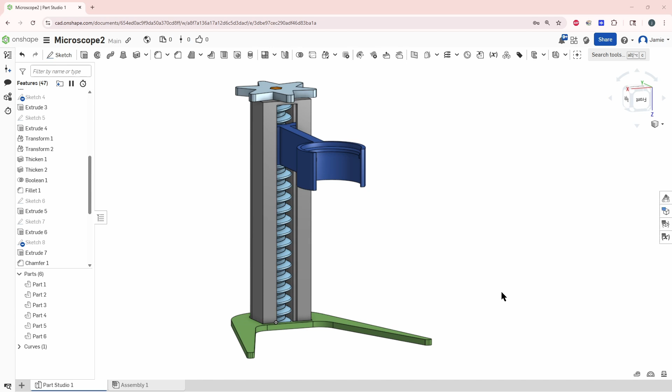Hello, this will be part 2 of the microscope, and this time I will be working on creating a modular microscope. I will create another holder, and then another screw, and interlock them together. So the two holders will interlock and the two screws will interlock with a hex key. Alright, let's get started.

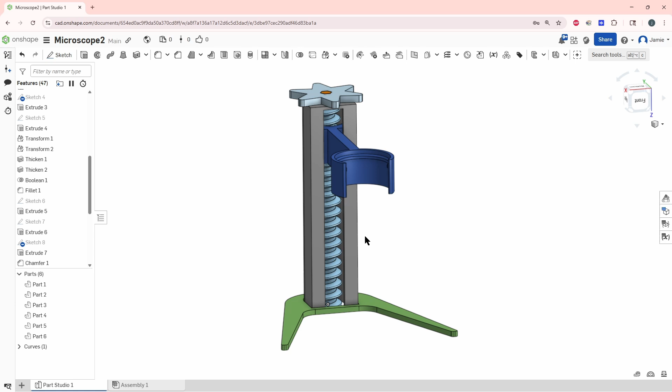First, let's take this one and transform it. I'm going to grab these items right here: 1, 2, 3, and this guy right here, 4. Okay, and I'm going to move them straight up. So I'm going to translate X, Y, Z, and then we're going to go in the negative Z.

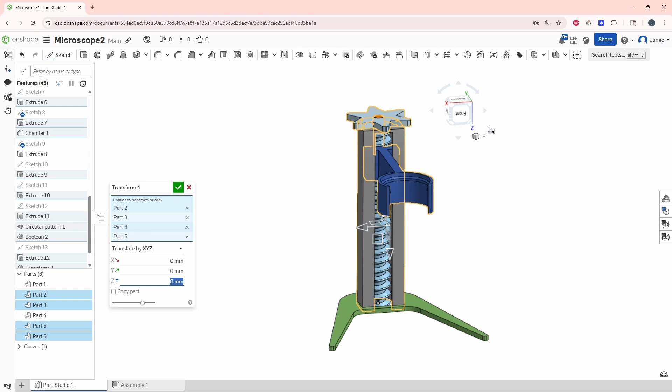Let's pull this over, so it's negative Z right here. We're going to go negative 120, and we're going to not copy. Here we go.

We can actually select this guy too. We're going to make a new one of those, not the hex itself, but the actual body. So there we are, choose OK. And our hex, we can left click, right click, and hide this guy.

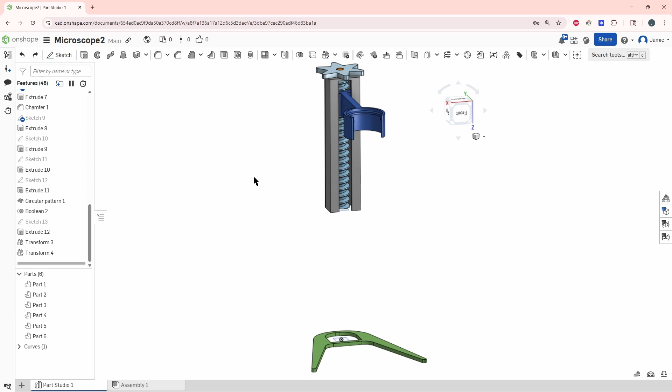Alright, so now we're going to transform these two pieces and move them down. X, Y, Z, and 120. We're going to copy these parts now. Click on that little button right there, green check.

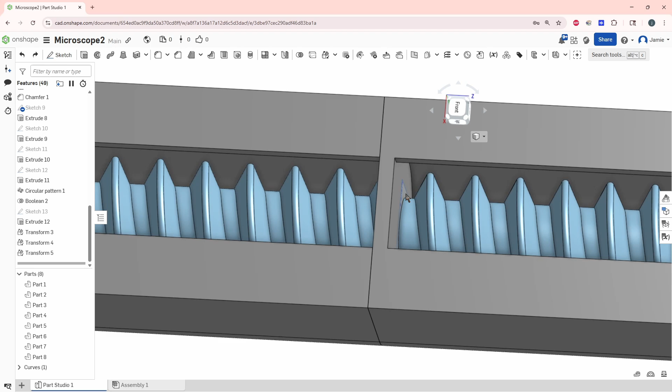So now we have the height, and we can see that this does not match up with each other. So I need to blow this through, or what I'll do is take this and match this edge up with this edge right here. That's 4 millimeters because the helix coil was 4 millimeters.

So let's go create a plane on this surface right here. We're going to push that 4 millimeters down, and this will be our split plane. Okay, so now we've got to do a split.

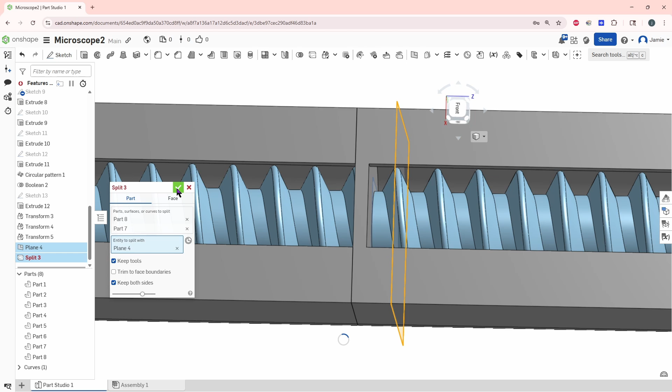I'm going to click on this guy, click on this guy, and we're going to split with this plane right here. It's okay, it's thinking. Alright, so now we can do a delete part right here. I'm going to delete that guy, delete this guy. Okay.

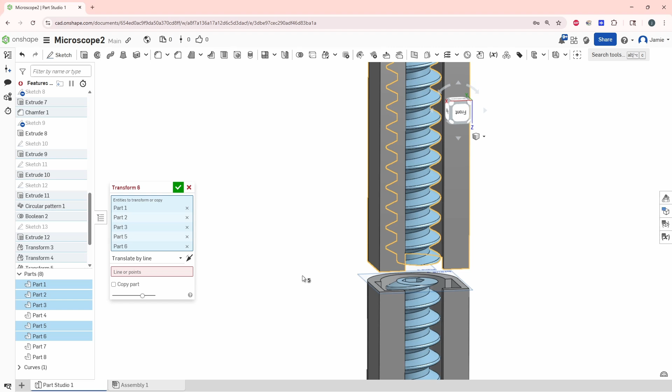Alright, now we're going to do a transform, and we're going to take these items 1, 2, 3, 4, and 5, and translate them down the 4 millimeters plus 2 millimeters because of the extra gap I already had. So 6 millimeters total. Let's go -6, or I'm sorry, we're going +6. No copy, just moving it down.

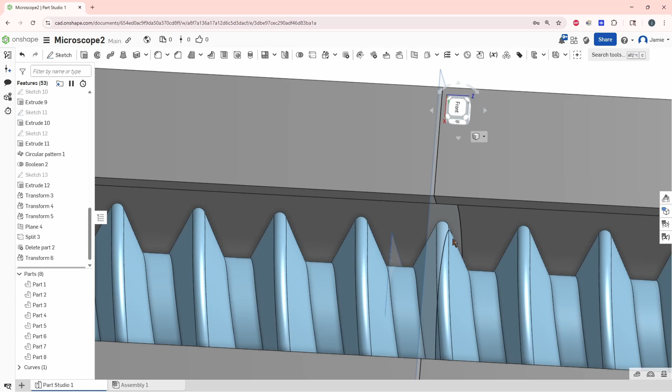Alright, and there we are. Let's see, our shape is matched up now. So now when we 3D print this, after we're done, we could put a little identification mark, maybe a little paint mark right there to match up those two.

So now we will need this hex down here. This hex has to go in between here. So let's move that down. Let's create a copy of it, and we can move it down. So let's do a transform.

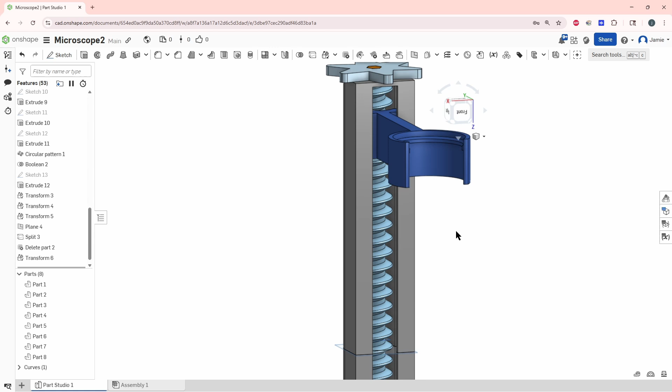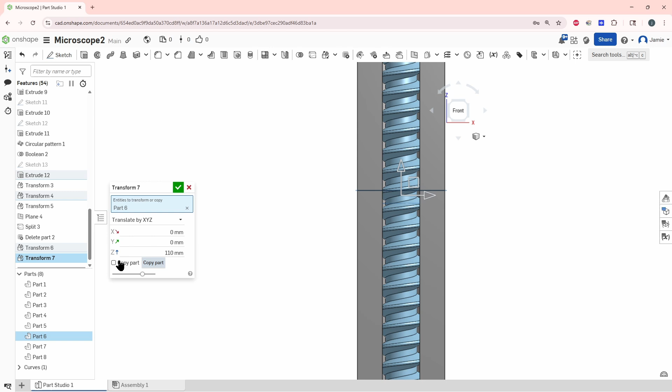Grab this guy. It's having a hard time choosing it. There we go, alright, and we just grab. We can actually click over here, do X, Y, Z, click on front, and pull it to where we think it's approximately. And we need to copy part. Say OK.

Now let's click there, hide that part. We can hit Y to hide that, and we can see our hexes inside of there. Okay, control Z to undo that. Now we've got our 2 hex to tie those into place.

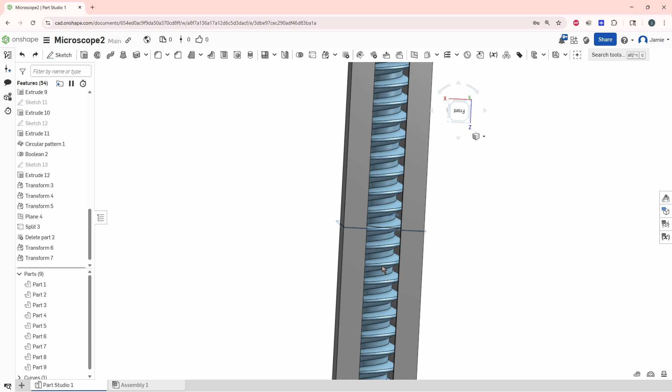Now we will need to create the geometry to hold these guys in. So let's start a sketch on this surface right here. Let's hide this guy: click that, hit Y, click this, click Y, click that, Y. So now we're going to create a sketch on this surface right here. So let's go to sketch.

And let's start, now we can create our shape here. Just a rectangle here to here. Escape, dimension here to here. We'll do like 8 millimeters here to here, 4 millimeters.

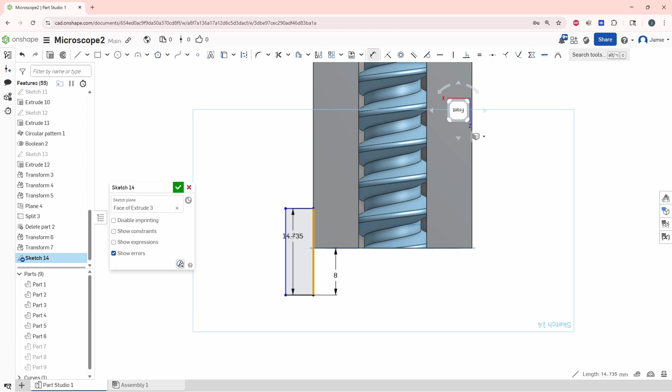And then we're going to create a shape that goes basically from here to here. We're gonna match it up so we hover over that one, and you see the dotted line. That's exactly what we want right there. And then we can connect it right there like that.

Let's hit our M for trim. We trim that guy. Let's put a couple dimensions on here. Let's say this is 2.5, and then here to here is 4.

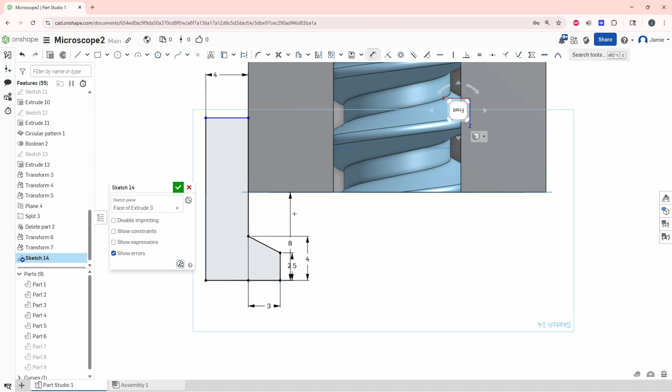And then we can check that size here to here. Let's do this like 3 millimeters, so this will go into the other part 3 millimeters. And yeah, so it will tuck into there, right? I think that's pretty good right there.

We'll add an edge right here. We'll change this here to here. Hit M to trim that. Oops, I need a Control Z.

Okay, so there. Now we need a line to go straight up. So we got to go from here to here, here to here. I have to choose here to there. Okay, escape to get out of that. M to trim, we're gonna trim those two. Trim that guy, all right, trim this guy, and let's put an angle on this.

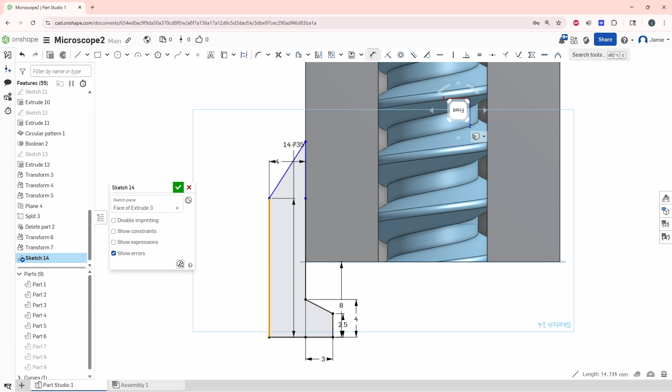We want it to be 45 degrees. Here to here. Angle here to here, all right, and then 45. There we are. Lock this guy into place. Now we're going to click on vertical. Click on this guy, we want him to be vertical. All right, so that's our shape right there.

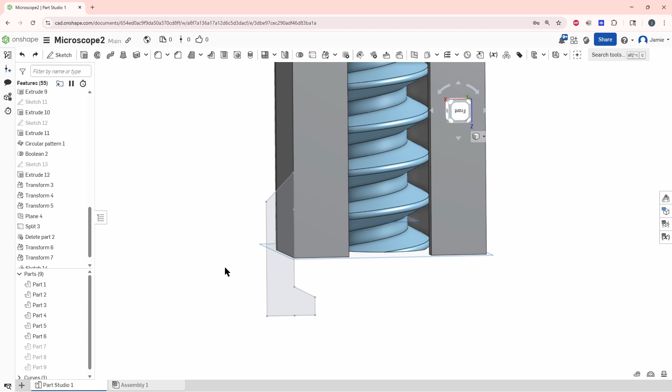So let's hit finish sketch here, and let's do a sweep on this guy. So over here, we're going to click sweep. Faces, sketches, regions to sweep this guy right here. Sweep path, we're going to create our path here, which is here, here, here, here, and here. Click OK. And this clicks add, so it will add it automatically, so it will become one piece, all right?

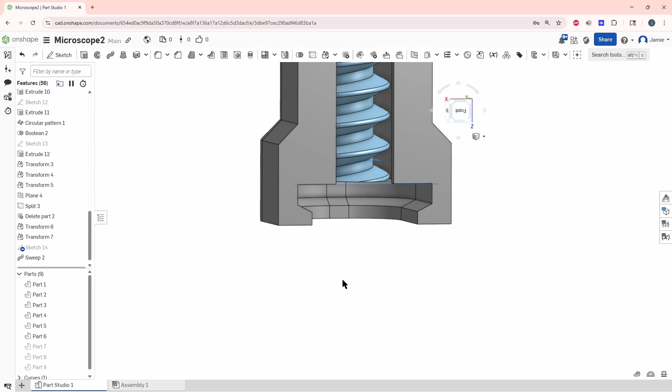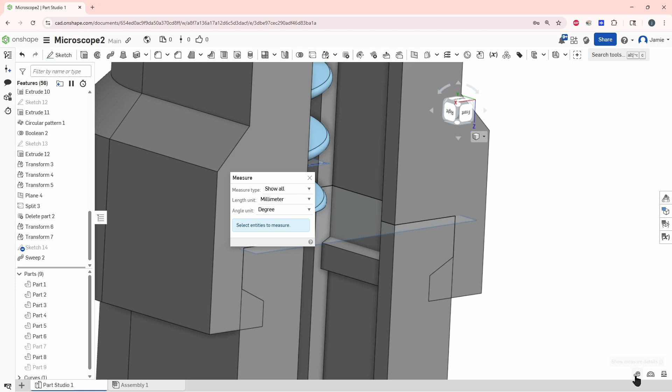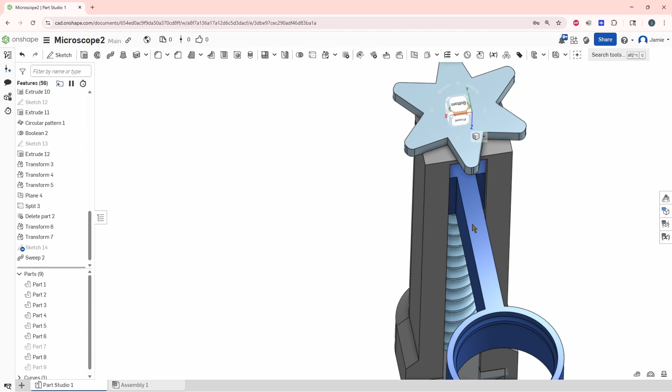All right, so now we go to the other side. Let's click on part 8, and we can now see we have interference inside of here. So let's, we could see this is actually coming through. So we don't actually want it to come through. We need it to be a little bit recessed back the other way. So we'll change this dimension, and we might actually make the thickness of this entire guy just a little bit thicker to allow for us to lock into each other, because right now this would affect your 3D printing.

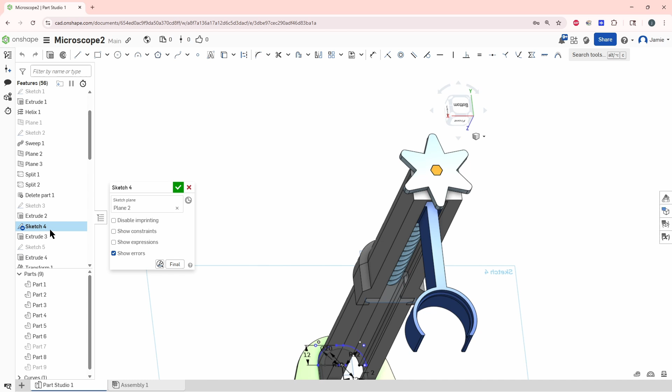So let's go with one of the very first sketches. Go into sketch 4 here, and we're going to change this outer dimension. Thickness of 2, we're going to change that to 3.5. So you see it just created everything a little bit thicker. Okay, click OK, and now it's going to update everything.

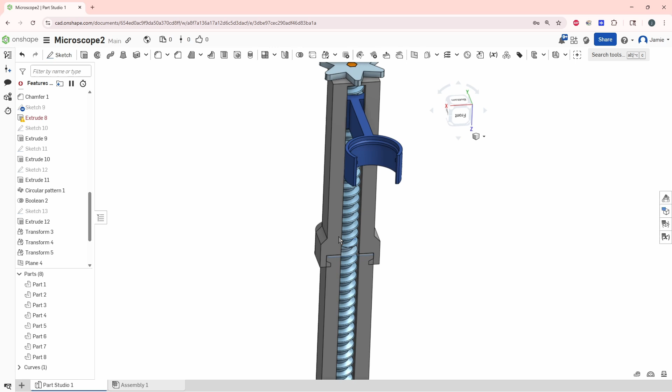All right, so now we updated our thickness, and looks like everything is updated except for the bottom area. It looks like the sketch broke. So what we can do is we can go through and fix this sketch here. Looks like the thickness has changed, and it didn't like that.

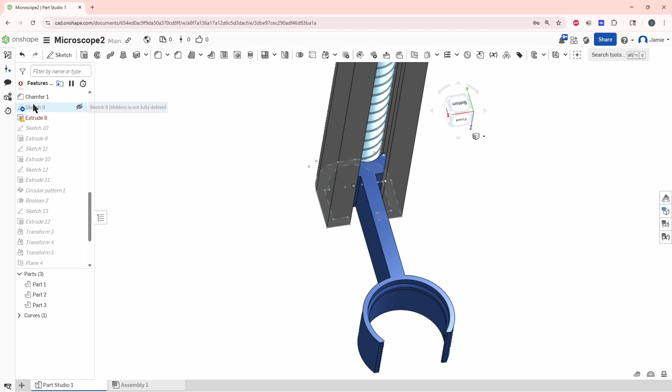So the extrude, now I'm gonna have to go back into sketch 9. We'll fix this sketch right here. So it looks like that offset. Let me hide this guy, click Y. Looks like one of these updated, but the other one didn't.

So what we can do is we can mirror. Let's hide this guy, Y. We click on Y to hide that. So what we're going to do is take this shape right here, and we're going to mirror it about this line right here, and we can delete this guy right here and delete. So we got a bunch of deletes to do.

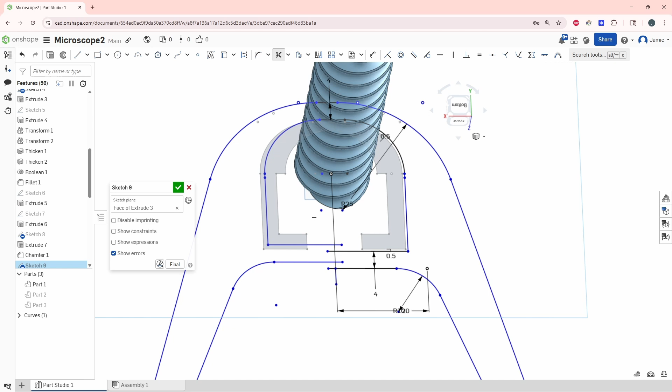Let's go trim. We're going to trim this guy, that guy, that guy, we could, yeah, we can keep the back one. Trim that. And now what we should be able to do is mirror all of these guys.

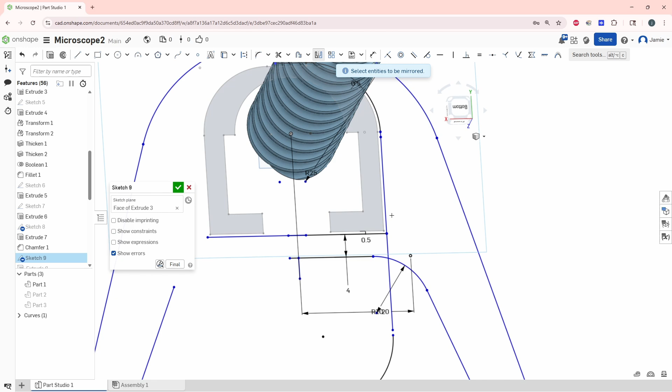So let's click on mirror. Select the mirror line, which is this guy right here. And now we select our entities to mirror. So the reason this happened was when I must have mirrored it, I didn't have all the offsets picked properly. So this outside edge must not have chose it properly. There we are, we can choose that guy, mirror him. And we might as well mirror this guy.

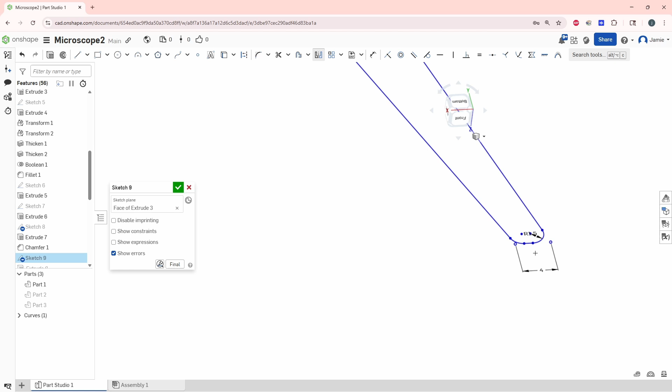We'll get rid of these spare things. Okay, that's good. We're entirely mirrored now.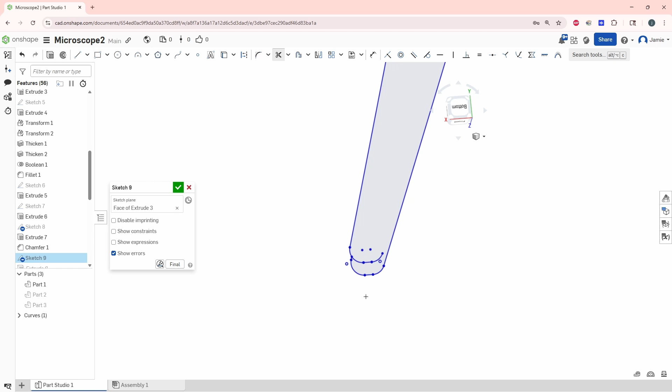Let's do a trim. Let's go to T. We can trim that guy. Trim. And we can trim. Looks like something's going on here. Trim. Let's do a mirror on that.

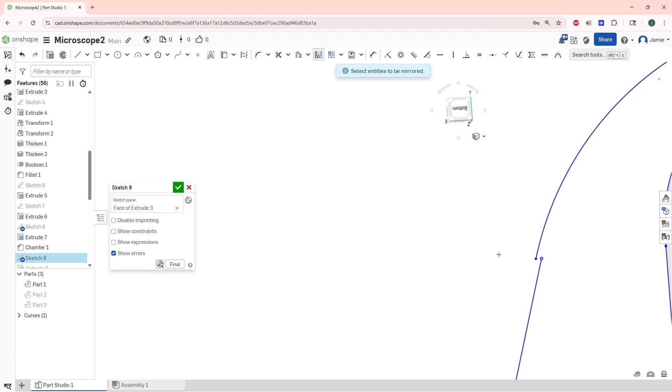We'll re-mirror this outside guy. So let's go to mirror. Select the mirror line right there. Features mirror, this guy. Is he connected? Yes, he is. Is he connected there? No, he's not. So we'll mirror this guy.

And now we can go with T, trim. We're trimming this guy. And we can finish now. And our part should pop up now. So we fixed that, the stand. So let's show our hidden parts.

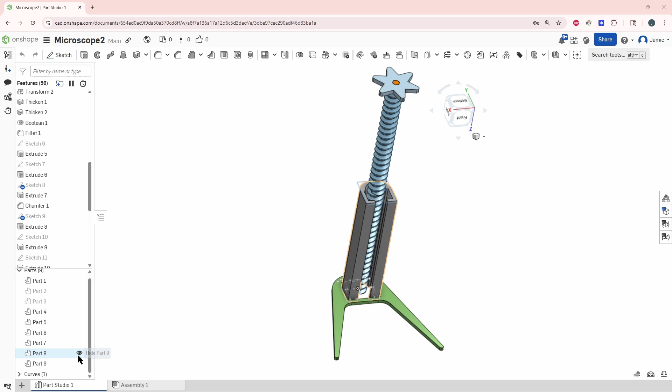Now we need to go through and remove the interference that we're seeing here. So what we want to do is we want to subtract this from this, but we want to keep this. So what we can do is a subtraction boolean.

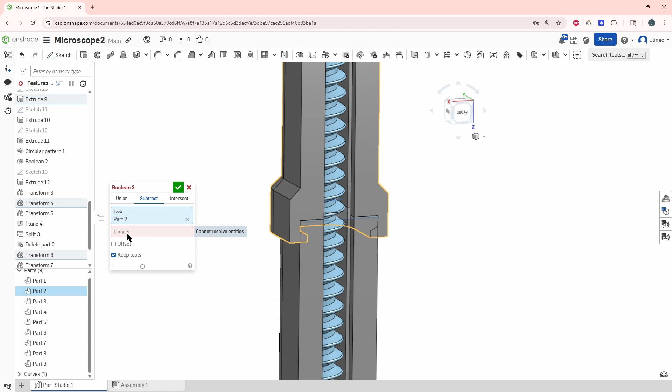Boolean subtract. We want to keep the tool. Tool is this guy. Target is this guy. And click OK. And we can see that trimmed it.

All right, so now we got two separate pieces. And we can change the color of this. We can left click, right click, edit appearance. And then we can change whatever color we want.

All right, so we have completed that subtraction. And now we can see the two pieces are created and they are keyed into each other. So basically this one will slide into the other one. All right, so we just subtracted that.

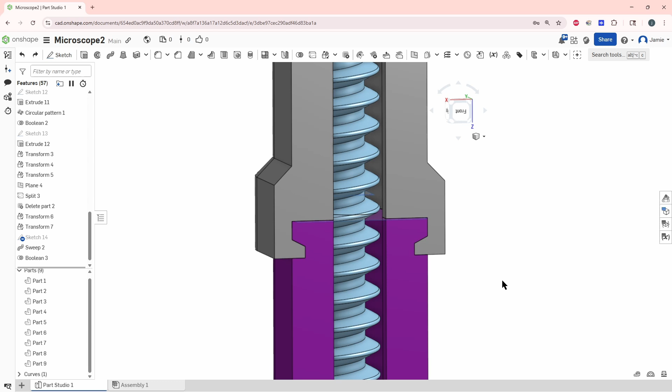So let's hide this guy. Click on it and hit Y. Now we want to go through and use the thicken command to make it so there's a little bit of clearance in between these two and the other part in the bottom there. So let's go to thicken.

We're going to click on these faces right here, and it's actually already populating. So what I can do is I can put in here like 0.3. And then I can reverse it, and then we can see what it's doing now. So that's good. Let's reverse all of these.

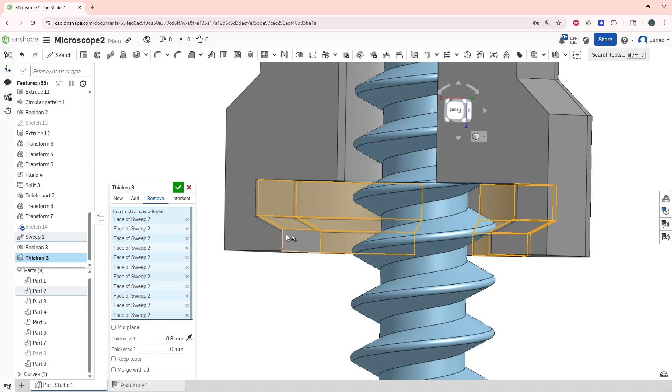So we're going to click on each one of these. And then on these guys, we can hide this screw in a second if we want, but I can see around it, so that's good. So it looks like I have everything chosen. All right, click OK. Now we can bring back that one part, and that part is 8.

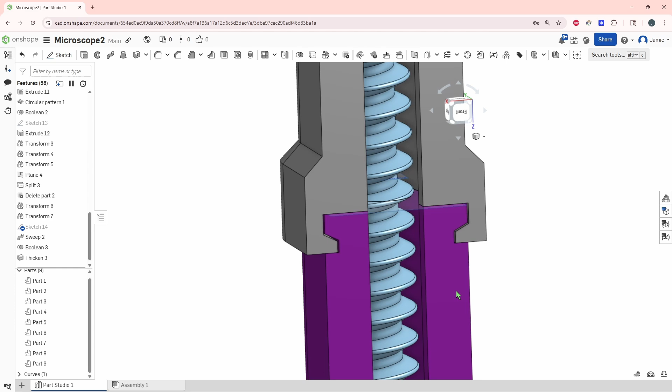Let's click on the little eyeball. All right, we are now back, and we have a little bit of clearance in here. So you may want to 3D print this and create a split here and a split here, and then mate these two together and see how well they fit together. If you see any problems with that, then you can modify this clearance a little more.

And so another thing we can do, let's hide this guy right here. Let's put some fillets on here so we can make it fit in there a little better. So this edge, yep, it chose all of the edge, so that's good. We can choose this edge, do the same thing, this edge.

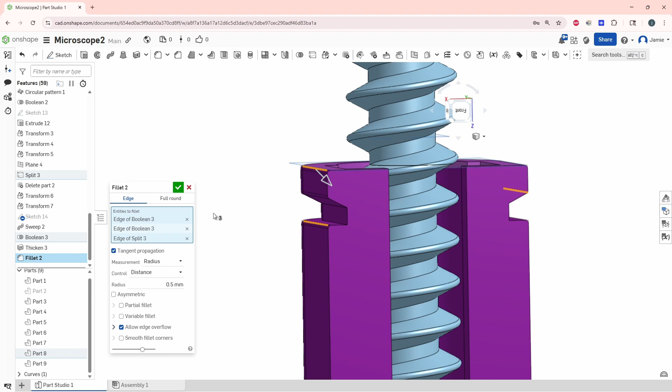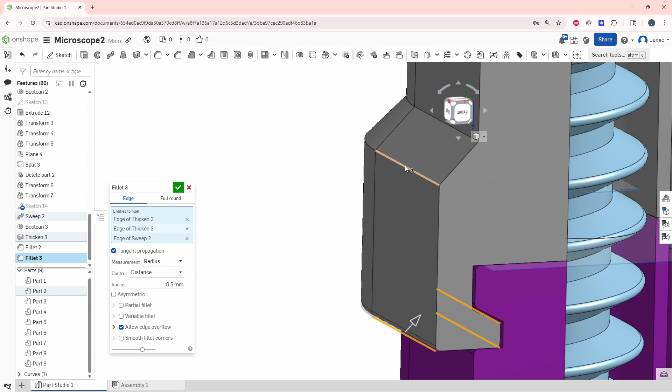And I don't want to do that edge because it will actually possibly interfere with the other part. So let's show the other part. And yeah, so if we brought in that edge, we may possibly interfere. So we can choose this edge for sure. So we can go here, we can add that edge, and this edge would be just fine. We can modify that one, this one, on this one, so it follows all the way through. Okay.

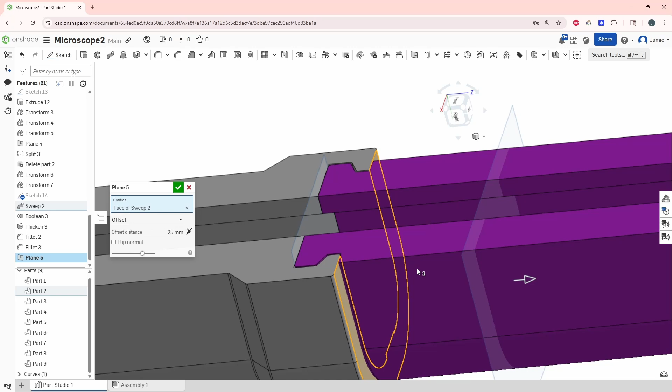All right, so I would say give this a test 3D print. To chop it and do the section view, you would take a plane, push it down, let's say 10 millimeters, just far enough to clear that for sure. Actually, 25 millimeters might be acceptable.

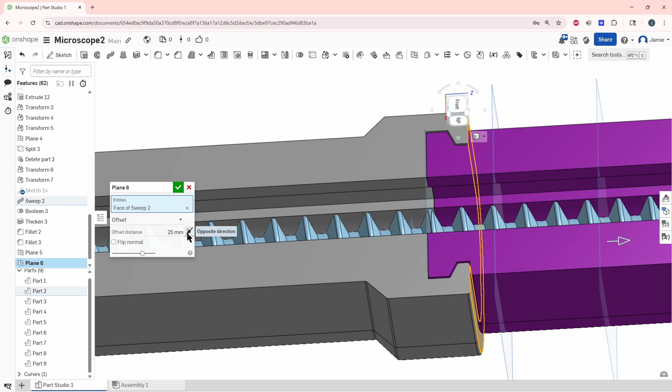Click OK. Then we can create another plane on this one right here. Actually, cancel that. We would create another plane using that surface, and then go backwards. Let's pull this a little closer, about right there, so 20 millimeters.

So then you can do 2 splits. To do the splits, you go here, click on that, split with this, and then you can do the same for that one.

Now we have a different body here, and to get this exported and 3D printed, left click, right click, and go to export. We can export it out as an STL, and then print that and see if these match up and work together.

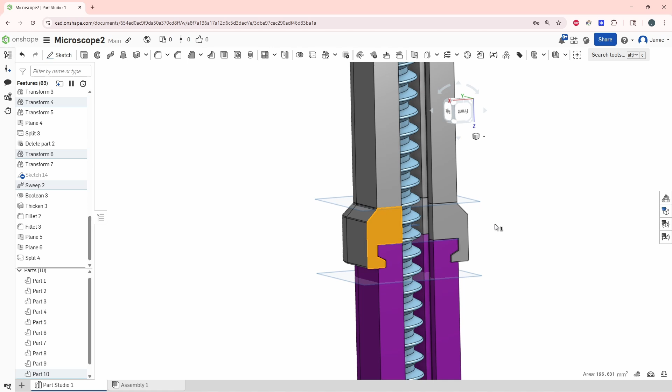All right, so I'm going to Control Z, undo a couple of these, and get rid of those split lines. If you want to make this truly modular, and only want this top portion to work, we would have to shift this top portion down or shift this all the way up.

So let's create a copy of this. We're going to move this up. Let's do a transform. We're going to click on this guy and move him up.

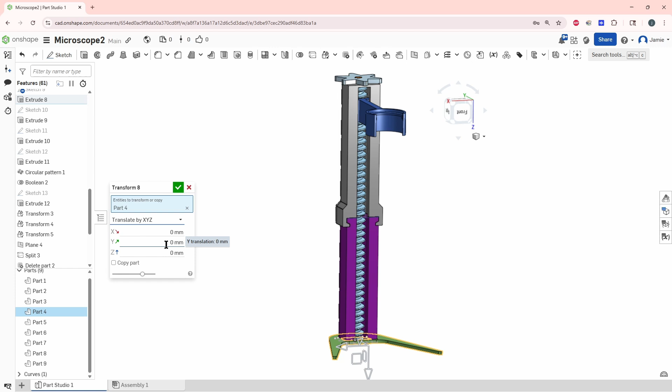120 plus 6, so 126. We're going to do X, Y, Z. We're going in the negative Z direction, so negative 126. And we want to copy that part.

Okay, we can see now. Let's hide this guy. Click on him and hit Y. So now we'll have to make this 20 millimeters thicker.

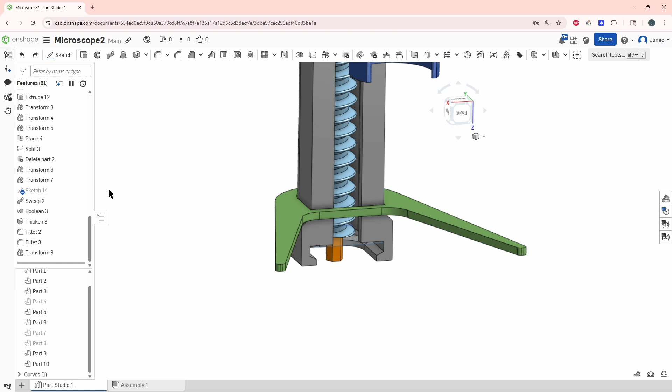We're going to thicken up this guy. We want to make sure it has enough material, because we now have this additional material that we get to clear. So let's thicken up the outside of this. Go to thicken.

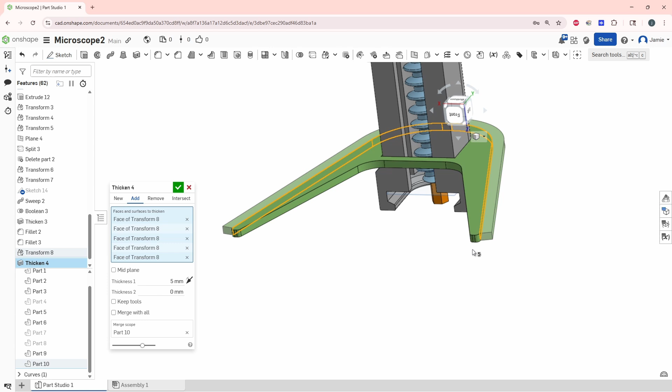Click on all these faces. We'll go down here and choose like 5 millimeters additional thickness. Say OK.

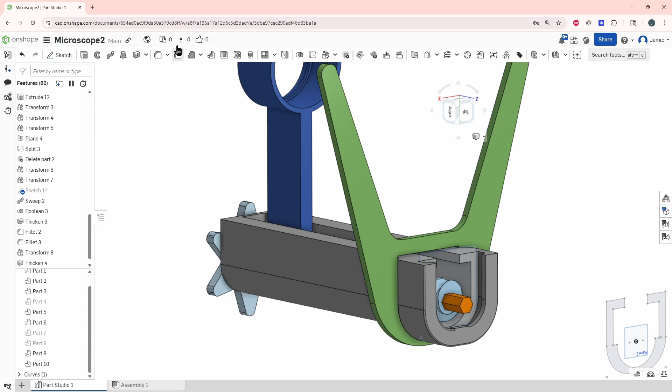All right, so now we want to take this surface and push them down 20 millimeters. So let's thicken that. 20. 20.

All right, so now we are thick enough to go down inside of there, but we see there's interference now. So let's go through this original green piece and we can modify that. Let's hide this guy right here real quick, it's kind of in my way. Click on Y, click it, click on Y.

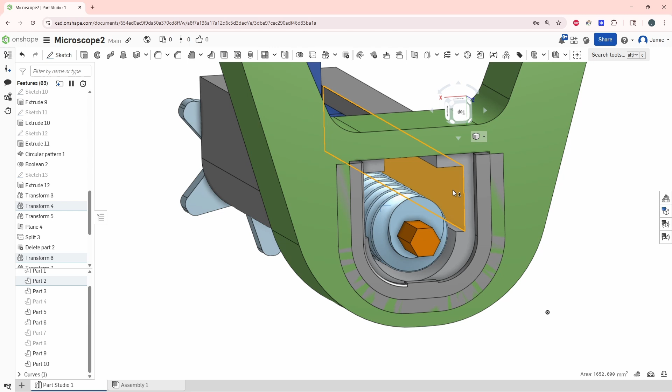So now let's hide this guy right here. Left click, right click, and we are going to hide part 2. So we'll remember that the name is part 2. And let's go through and open this guy up.

So let's do a thicken. We're going to flip it the opposite way, and we're going to change it to, I'm going to try 2 millimeters. We'll see if that has interference.

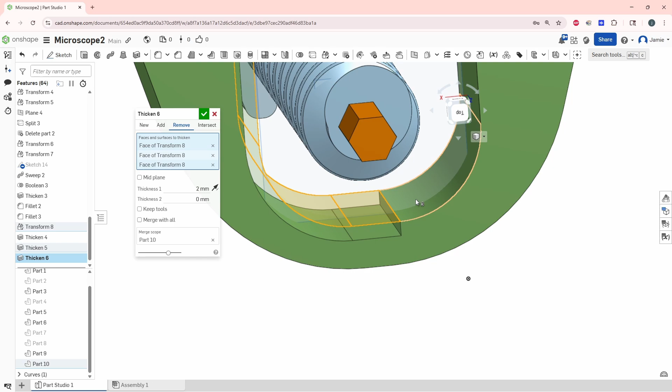Let's bring in part 2. We're still hitting a little bit. We're going to double click on that thicken 6. We're going to change this to 4 millimeters, and now we should have clearance between there.

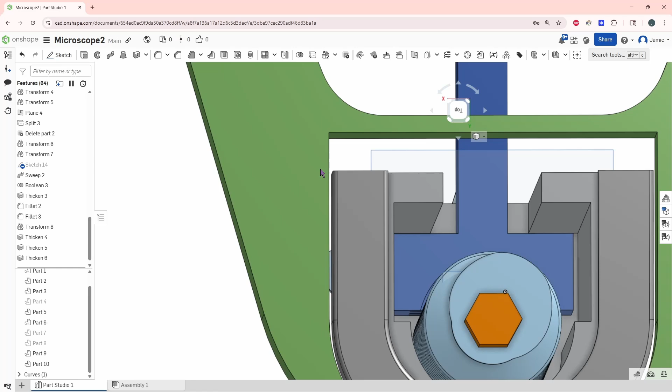So that's about 0.5 clearance, and we want to reduce this clearance. So let's do another thicken here. We're going to push this back 4 millimeters. There we are.

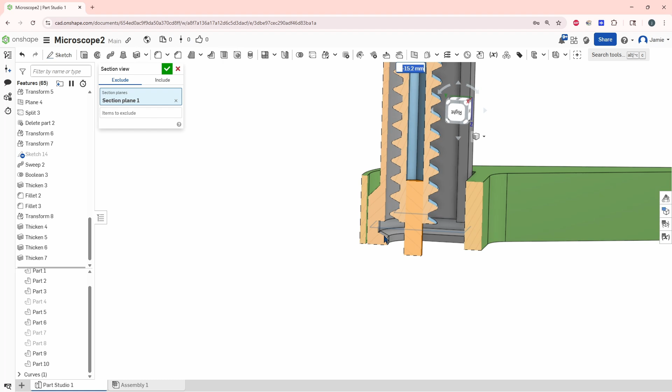All right, so that should support this enough. Let's go to section view and take a look at this section here. Click on that, pull this in, and yeah, we can see that this face is going to hit, it's going to hold it into position. So this should be plenty thick enough.

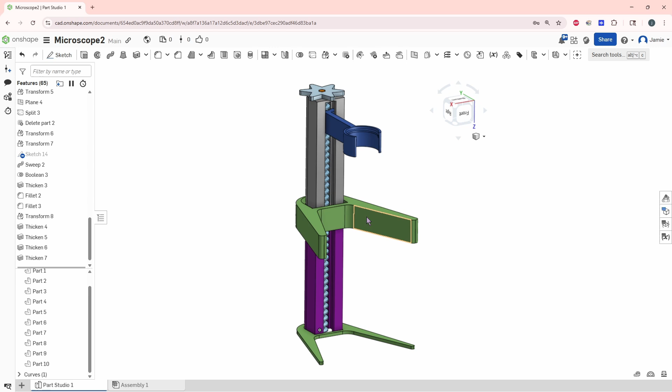All right, let's show all the parts. And there we are. So if you want to have the modularity, you would print this extra piece right here, and then you can remove this piece and this piece. I'm going to hide this, click on it, and Y.

So this completes the modular microscope holder.